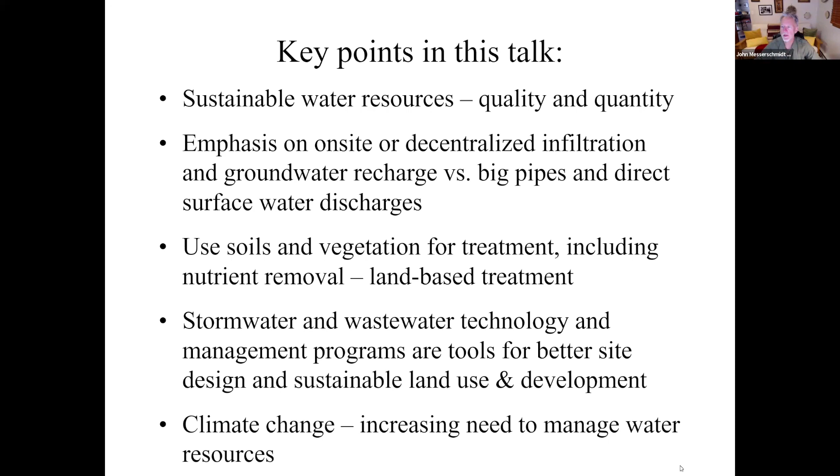So again, I'm not going to spend a lot of time on these, but basic groundwater hydrology principles are critical for a lot of this, just being aware of where the water is in the soil. Next slide, please.

And then another one—I won't go into this much, but part of the goal in all of this is to maintain the existing natural hydrology of an area and not disrupt it. I'll explain more about that a little later.

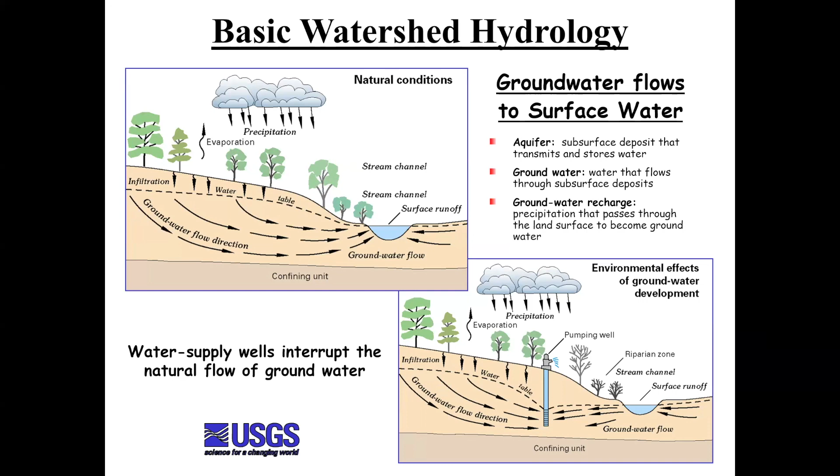Another slide, and this one I wanted to keep in here—it's a bit redundant, but the sun is a key principle for a lot of the way land-based systems work. Any system using soils and plants, like a septic system with grass over it, that lawn is doing work to pump water out of the ground as the grass grows, evaporating it and pulling up nutrients from the soil.

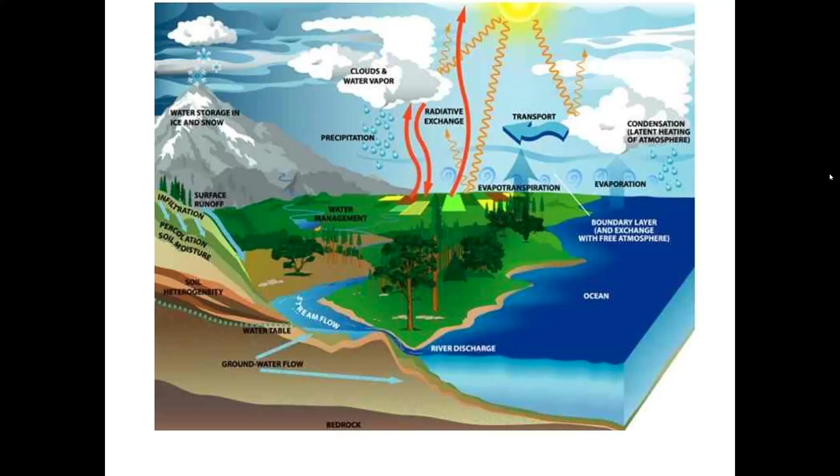This is here to show what happens when we alter hydrology in a big way—this is stormwater management and green infrastructure, which I barely touch on here. Green infrastructure is a term for natural, on-site stormwater management practices. It's now the approach of choice by EPA and New York State DEC, though the state hasn't embraced these ideas for wastewater. But the same principles I'm talking about are wrapped up in green infrastructure for wastewater in a lot of ways.

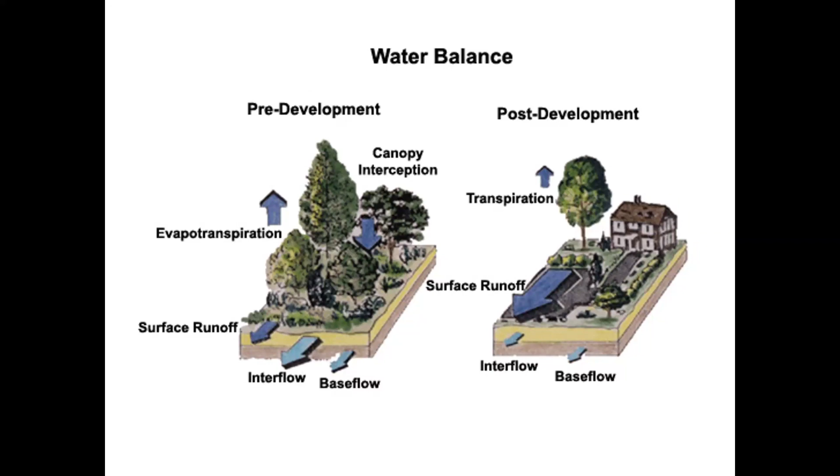So this slide shows on the left a pre-development, more natural watershed, where a lot of water soaks into the ground, becoming interflow and base flow, with very little surface runoff shown by the blue arrow. When you pave over the landscape and create a lot of impervious cover—buildings and paving—you cut off that recharge to the soil and get a lot more surface runoff.

This is another way of looking at the effects of this, over time—say 24 or 48 hours during a rainstorm, before, during, and after. On the left, in a more natural watershed, shown by the solid line, you have more water naturally in the ground—the base flow that's there from the beginning because it's been recharged more. When the storm hits, some gets into the soil and groundwater builds up over time, but it's slower and doesn't reach as high a peak.

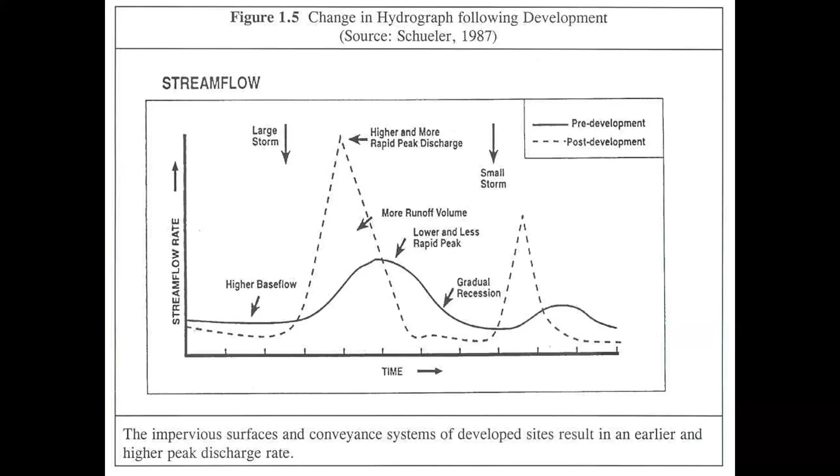The dotted line shows a paved landscape, depriving the groundwater of recharge. Your stream rises much more quickly during the rainstorm, which leads to flooding and erosion, and with the bigger storms we're getting, this is exacerbated. It drops off more afterward too, so you end up with a lower base flow and less groundwater left over, so to speak.

In places getting more developed, with more properties built, and most of the Rondout Valley is not like this, I'm sure, the stormwater issues and wastewater can both have impacts. That's why I've got this all in here.

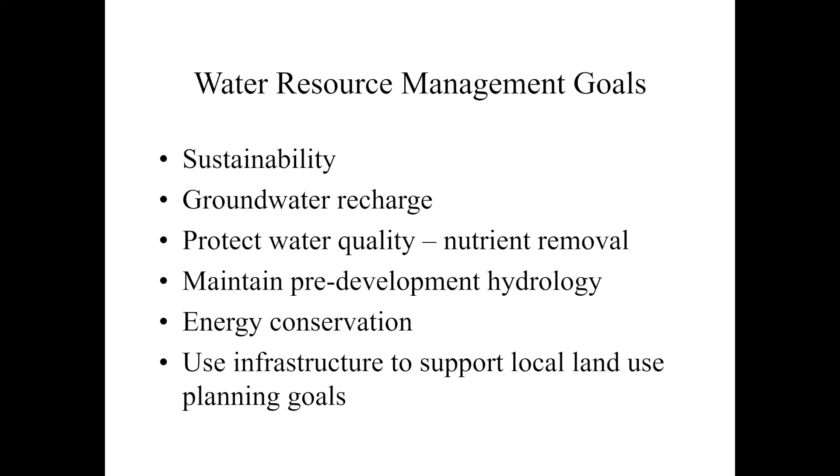So the goals we're really aiming for are sustainability, groundwater recharge, and removing nutrients from wastewater. Also maintaining the hydrology I mentioned, energy conservation—since treatment systems and sewer systems that move water can use a lot of energy if they have pumping stations—and using all of this to support your land use goals.

If you look at the history of sewers—London built sewers and put their wastewater all into the Thames. This is the classic example. But they didn't run it away from the city, and it caused a huge stink. They realized they had to get this away from there, so they built a big sewer system to move it farther downstream, which solved their local problem.

The sewer paradigm that developed in Europe and here was built to move wastewater away for sanitary and health reasons, to keep it out of drinking water and get rid of smells, but it didn't consider what we were doing to the environment, including groundwater. Gradually people realized we were polluting our water and it stinks, so we had to treat it before dumping it into the river. Treatment plants became a technology developed over time, and we now have wastewater water quality standards that are, in many cases, very high.

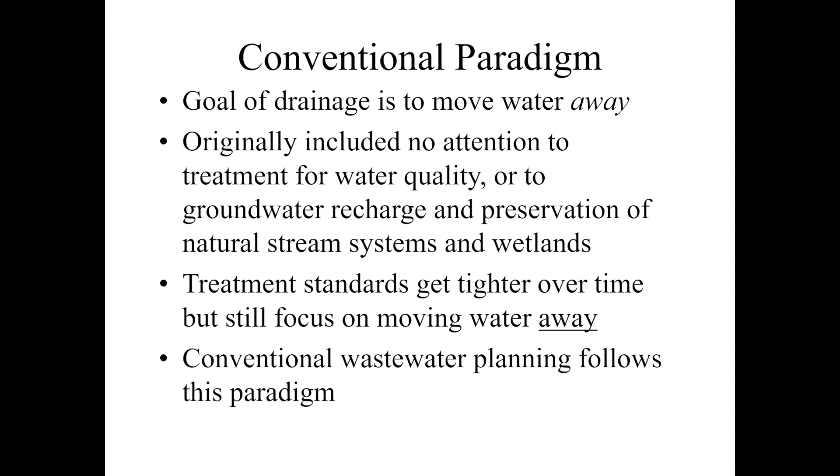So the sustainable approach is more to think about what you can do locally. How do you address all of these issues from the start before you invest in big sewer systems? Once you do, you're kind of in trouble.

Recycling the nutrients, I mentioned this before. You can use treated wastewater effluent, the treated water, to irrigate landscaping. You can irrigate trees and grow trees and use it as nutrients that make the trees grow faster.

And the other issue with bigger systems is the standard model, and this is getting a lot more attention now with environmental justice. You put a big treatment plant down typically by a river because you want to build the sewer system so it runs by gravity downhill as much as possible. Over history, the people who end up living near those places, or were living there in the first place often,

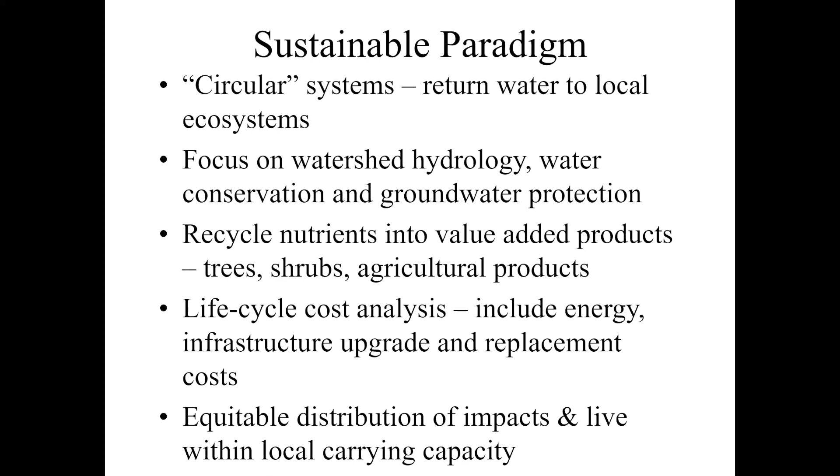So again, the big pipe is a term people coined that I like, that is a term for capturing this paradigm of the conventional approach, which is still, frankly, the preferred approach of the regulators, the engineers. The engineering community is a huge barrier to changing this.

It's a pond, and ducks will be on it, and you can't do that if you're concentrating all your wastewater in a big sewer, and you have 10 or 20 million gallons, or even 1 million gallons a day. It would be very hard.

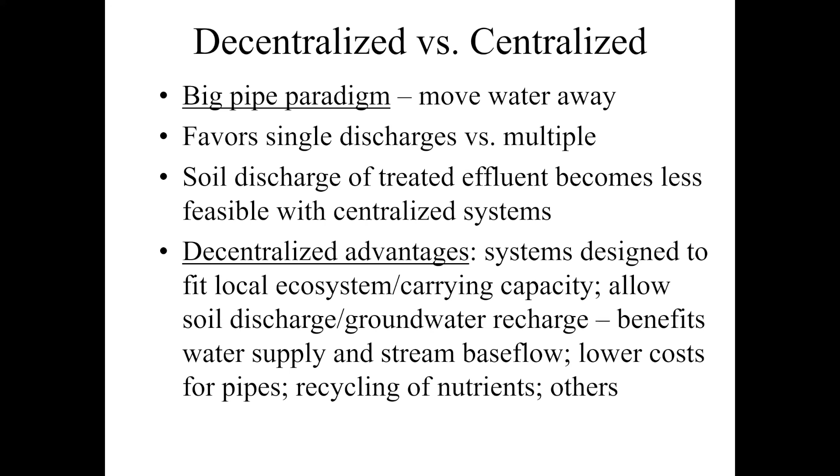But if you build a big sewer system, even at the scale of, say, one of the bigger communities that might be developing up there, and you do the classic approach that took hold in the 50s, 60s, 70s in this country, you plan for what you might need over 20 years. So, okay, in 15 years, we're going to have even more growth, and we have to have the sewer plant sized for that, and we have to size the sewers.

So you're investing all that money for capacity that's not going to be used for 10 years or more. And then that ends up driving the local politicians to see, okay, I've got a high new cost that we have to pay every year, and the people who are paying these rates are going to pay a lot of money. But if I get more development in here and use that sewer capacity up, we'll lower those rates. So let's attract some development to use all this capacity I just built. And that's a pattern that has happened.

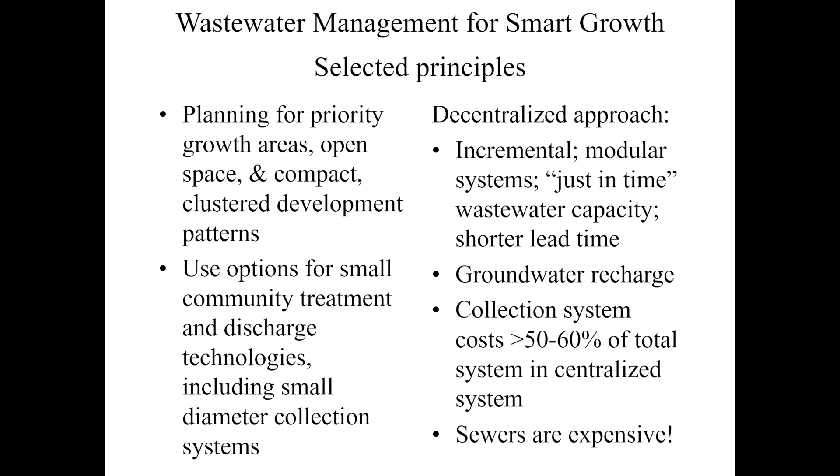Next step, next slide.

Centralized sewer systems drain water away. I mentioned something I didn't cover before about how it does it, because you're taking water out of the ground deliberately for drinking water and putting it into your sewer in the first place. Sewer systems also let water in through manholes, infiltration and inflow, or leaky pipes underground that are cracked.

The other thing I don't hear discussed much is that they act like a French drain. You've got a pipe along a buried trench with gravel at the bottom running downhill, so you're building essentially a drain for your shallow groundwater. If you have wetlands or small streams nearby, your whole groundwater table is liable to be lowered, even if there's no leaks in that pipe to let water in.

Finally, this is the problem that's also not discussed so much: these cracked old pipes leak wastewater out, and that wastewater has not been treated. So that's getting into the ground, and you can't see it. Next slide.

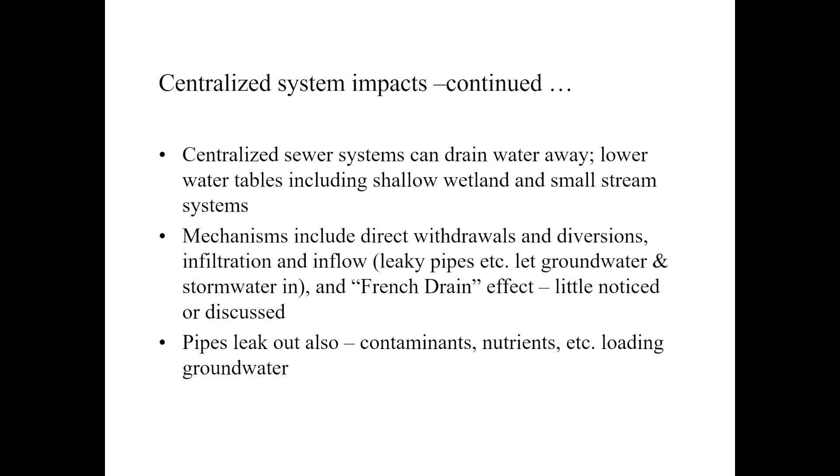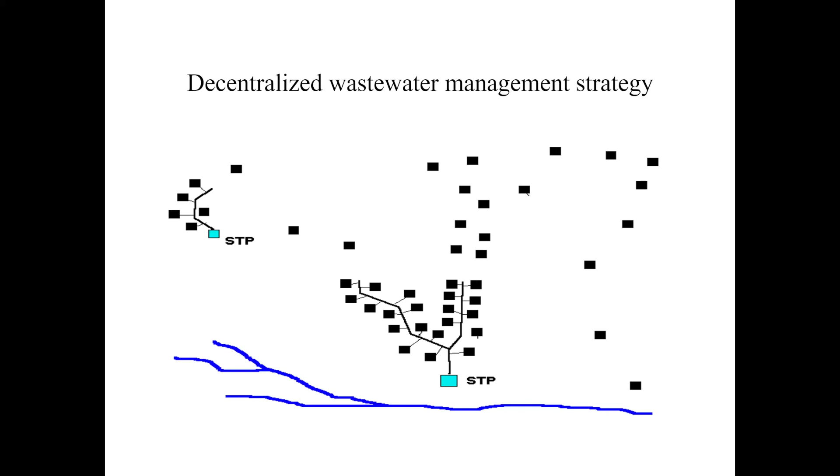Next slide, please. Yeah, that's the same—oh, there's something missing. Oh yeah, I see, it has an animation. I didn't see that.

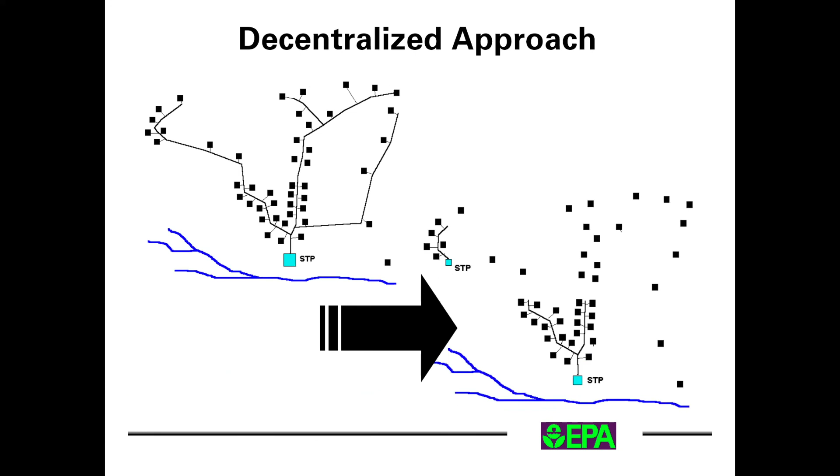Next slide, please. So, the nutrients—how many people here are aware of harmful algal blooms as an issue? Okay, yeah, some, and maybe others who aren't on camera. It's become a much bigger issue. The Wallkill River watershed was designated not long ago as impaired officially by DEC, meaning it's not meeting its water quality standard. The TMDL I list is an acronym for a plan for how to fix that, which is being developed. I'm pretty sure my friends in the Wallkill River Watershed Alliance were partly responsible for driving the DEC decision to do that—that's the watershed group for that watershed.

Nitrogen is the more abundant nutrient, but it tends not to be the main problem in freshwater bodies. There may be exceptions, it's complicated, but all three nutrients familiar to any knowledgeable gardener are nitrogen, phosphorus, and potassium that feed plants—those are the things plants need a lot of. In freshwater bodies, typically it's phosphorus that makes a big difference to water quality when you get a little bit more of it going in. That's the key concern now for harmful algal blooms.

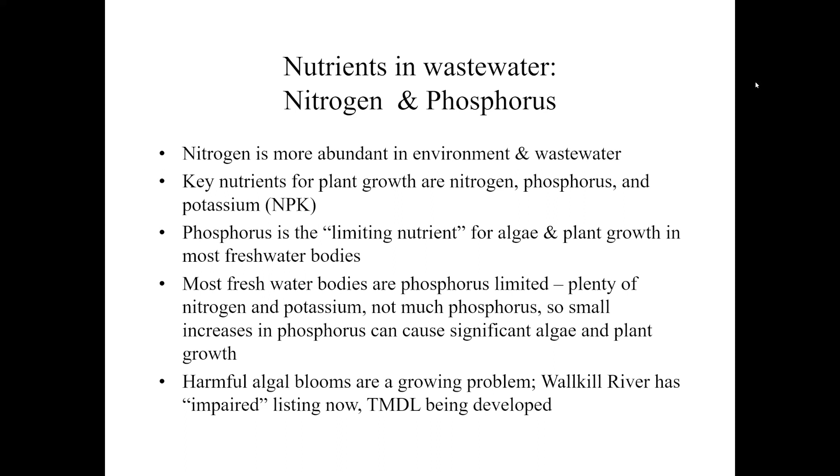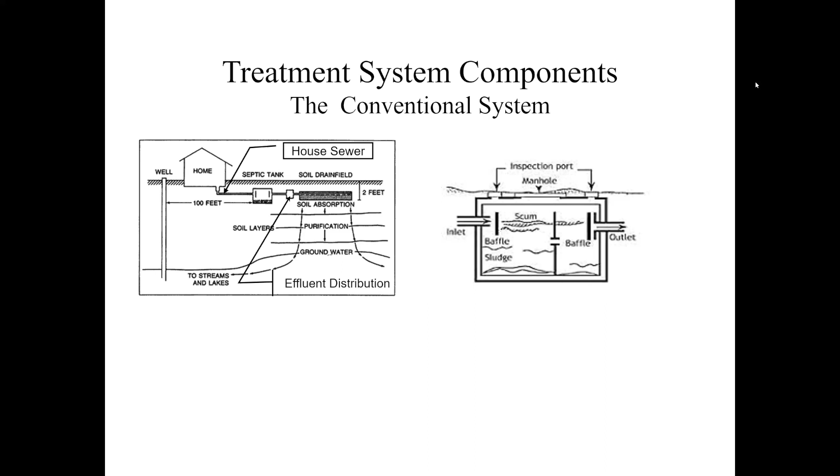The right side of this slide shows a cutaway of a septic tank. If you want, we could come back to this—I could talk a little bit more about what happens inside the tank and why it's important, but we'll move on for now. Next slide. Oh, I didn't see these parts when I put this slide together.

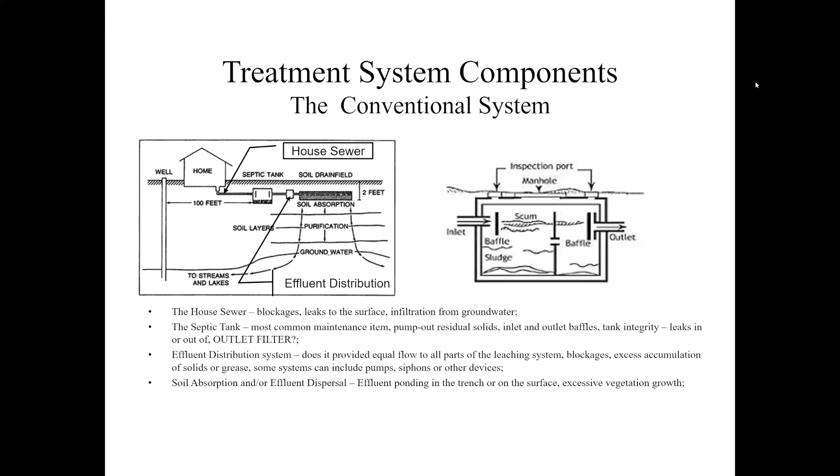To move up the ladder, so to speak, if you want to do more advanced treatment in an on-site or a small community system—meaning 3, 5 or more houses connected through a small sewer system to one treatment site—I focused on one brand called Advantex, made by Orenco, which was being widely used even 15 years ago. These are manufactured systems designed to provide more advanced treatment, taking out some of the nutrients beyond a standard on-site septic system, and they still put the water out, almost always, to a leach field or some kind of ground-based discharge. There are other brands, other makers.

If I can interrupt, what's the advantage of this Advantex system? The advantage of using a treatment technology that goes beyond a standard septic tank—where all you've got is a tank that goes out to the leach field or absorption field—is that you're doing a lot more treatment before you put the water into the soil. So your net result, when the water gets into the ground, or in some places they may use Advantexes to discharge to a surface water body like a stream, which is harder from a regulatory point of view, is that you're doing a lot more to keep water clean. That's the advantage, and there's a cost: it takes more maintenance to make sure these are working right. But a standard septic system needs maintenance too—that doesn't mean they get it.

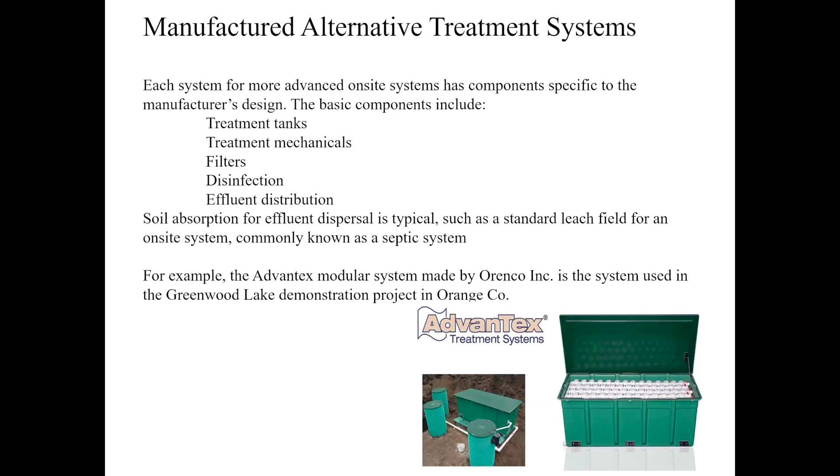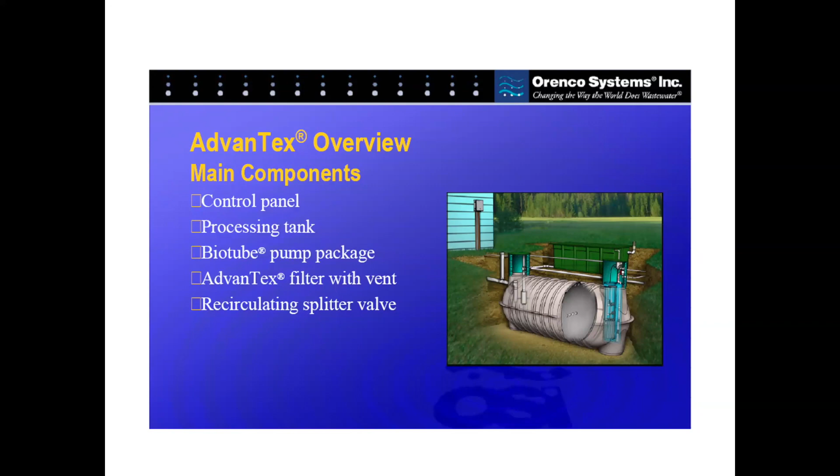So next up, this one shows a bit more clearly a schematic showing the system is going to be underground. Next slide, please.

I don't want to spend too much time on this because there's more to it, and I just happened to find this in older slides. I forgot all about this. There's actually a law on the books actively promoting the use of reclaimed wastewater for irrigation. I don't know whatever happened with that, but it's nice to have if you need it.

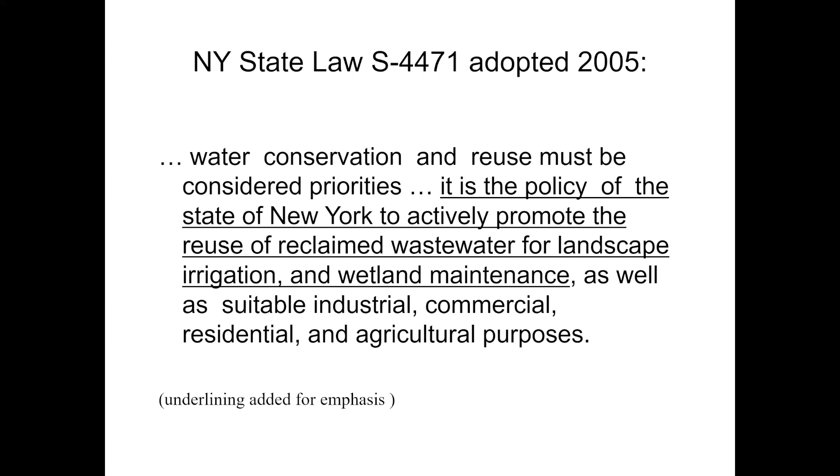Next slide. So now this is just going to be a series of slides. Again, I don't want to dwell on some of them too much because they're copied from an EPA slide set that's years old. But this is relevant for the kinds of approaches that communities in the Rondout Valley area can use going forward in an incremental way that build on what's in place already and could create a more robust management approach, with the community or municipality playing an active role to some extent. There are various options for how much role. EPA created this framework.

They rolled it out around here. There was a forum down at Bear Mountain that I helped plan a little bit, and they did one in every region of the country, in every EPA region, about this approach, which was essentially encouraging, where you're not going to put in bigger sewers, your options for a community, a municipality, or another organization, to enact a program to put in place steps to try to get better management of small systems. And essentially it's voluntary.

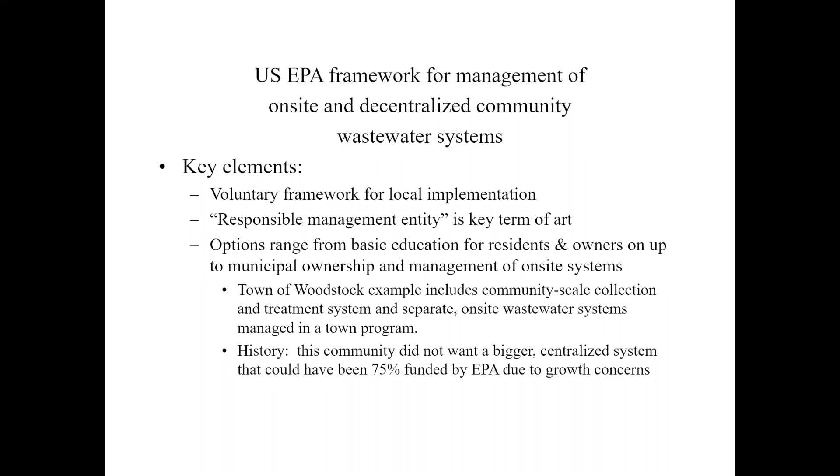So this is the overview of this management framework I just outlined. We'll just go through these quickly. These are the different levels. At the top is the title they give it, maintenance awareness. Find out where they are if you want to take that kind of step.

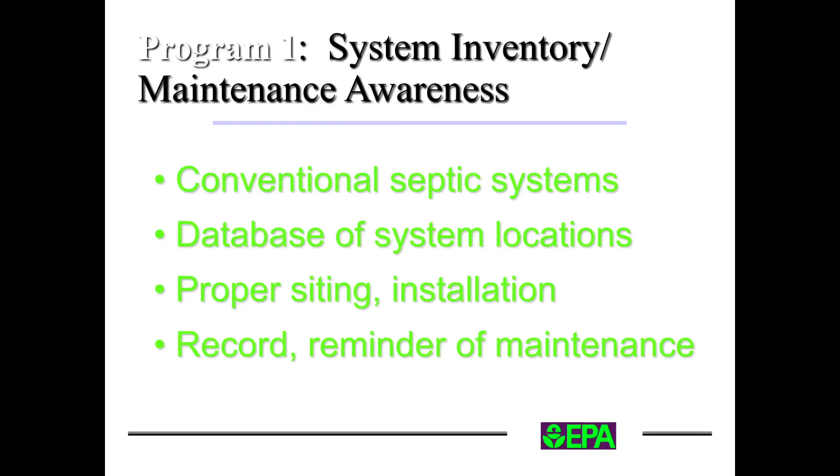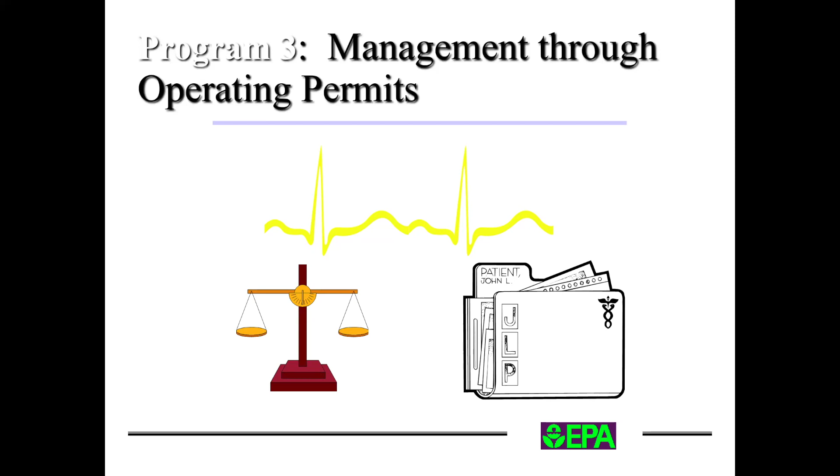There, you can use a maintenance contract. An individual homeowner can do this, or the municipality can. You can actually have a permit system so that whoever owns the system has a legal permit that's written, that says you have to do this for this system.

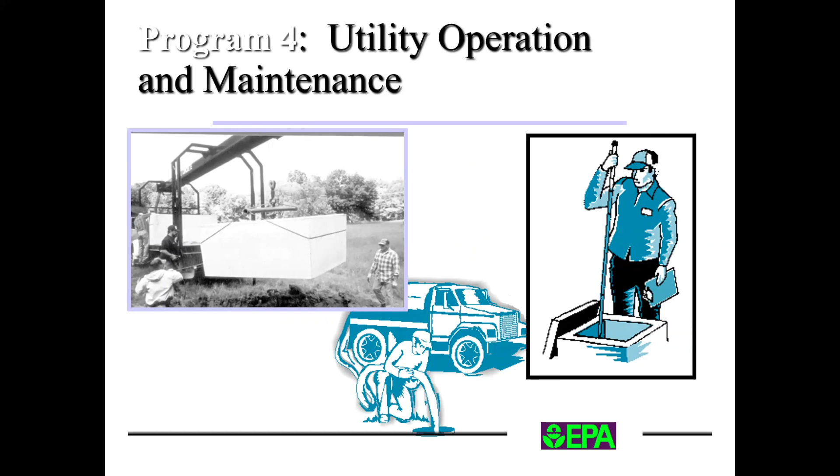This doesn't completely match what I said earlier about five levels, but here they're calling it a utility. That would mean, in what I said before, the municipality actually having their own staff. This is the highest level. They take ownership of it.

This is an approach EPA put out there to show municipalities, particularly, that you have a lot of options. It would be a good idea to do something about this, because right now, nobody's doing anything, really. The state health department in New York, the county health departments, typically only really go out and look at systems if there's an abject failure, like raw effluent running on the ground. It's up to homeowners and other people to maintain their on-site systems. Nobody's watching over their shoulder.

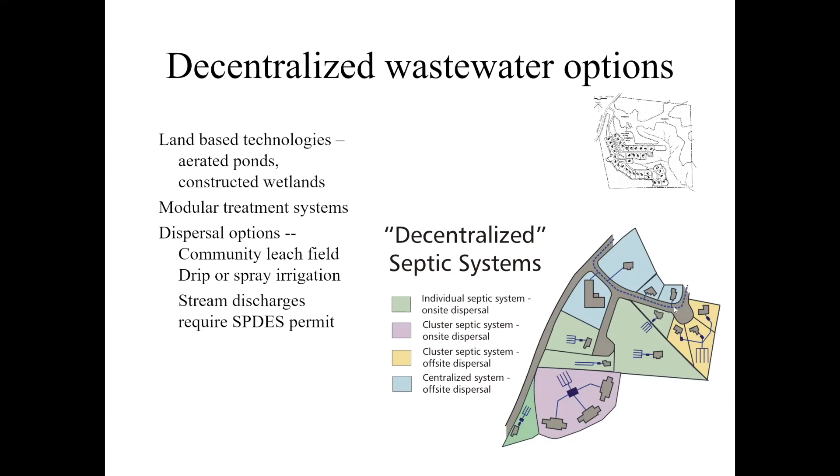This is another benefit of sticking to the small scale approach that I'm advocating. I thought about this a lot by this point, and I heard that the Rocky Mountain Institute, one of the top think tanks on energy issues in this country, was doing a report on decentralized wastewater management. I wrote a contact person there an email asking a question. Two years later, when they published their big report, they published my email and an answer saying this makes sense. This is one of the many items, 9.3, support of local economies, as a benefit that they called out. This is the best report I know about to this day. It's 20 years old now, but it really goes into a lot of detail, explaining a lot of the benefits and also the problems and impacts I mentioned. And it's not biased because they're honest about talking about the downsides of decentralized systems too.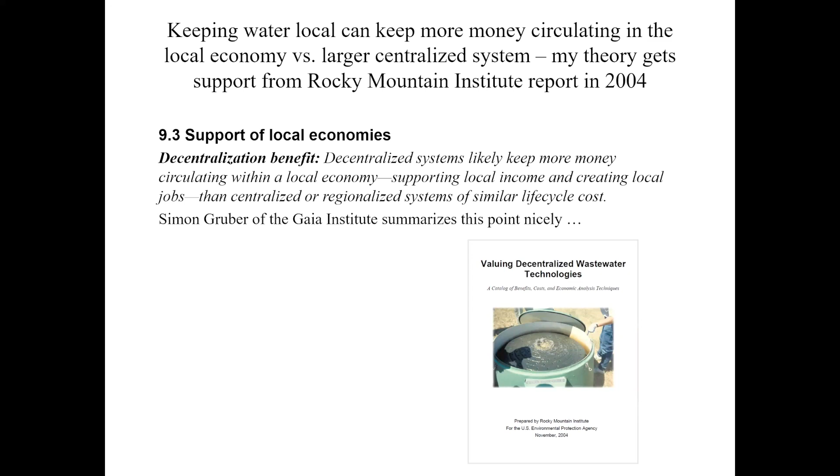So that's what I thought through, and I wrote it out. The email I sent them is like two paragraphs. It's in this book, and this is what I got. After that, they summarized it - they have a set of information, about a two-page piece. I can send a link. I should prepare a set of links for all of you to have for more information. That report is available for free on the web.

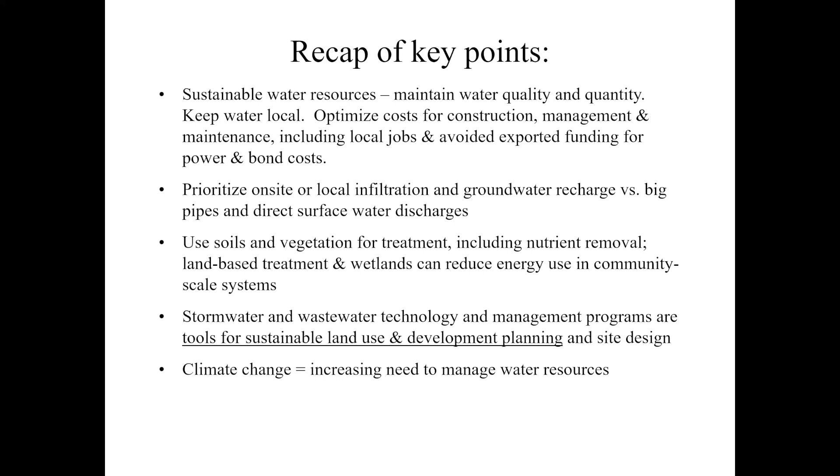So this is the recap. We're near the end. I pretty much said all of this already, and don't need to repeat it. This is sort of the closing.

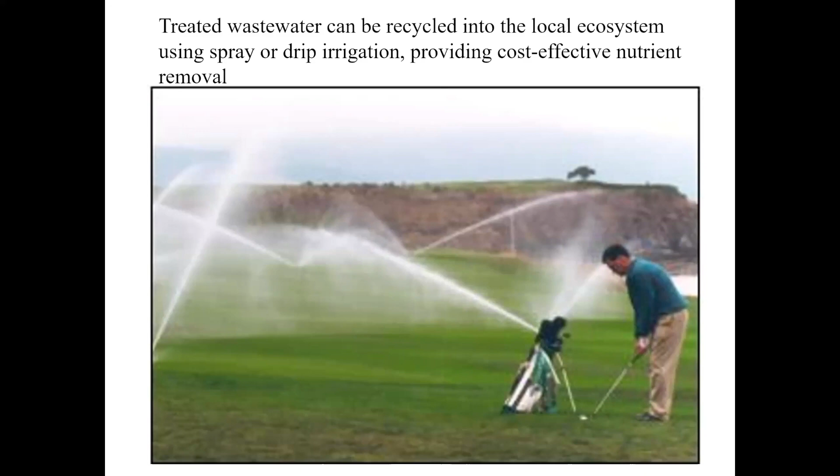Next slide - there's the guy who's desperate to play golf that day. Honestly, the idea of spraying while someone's out there - you don't spray every day, to be clear, because if you did that, the ground would get wet. You have to apply water in tandem with what the grass and plants can take up. You have to manage it, but it's doable.

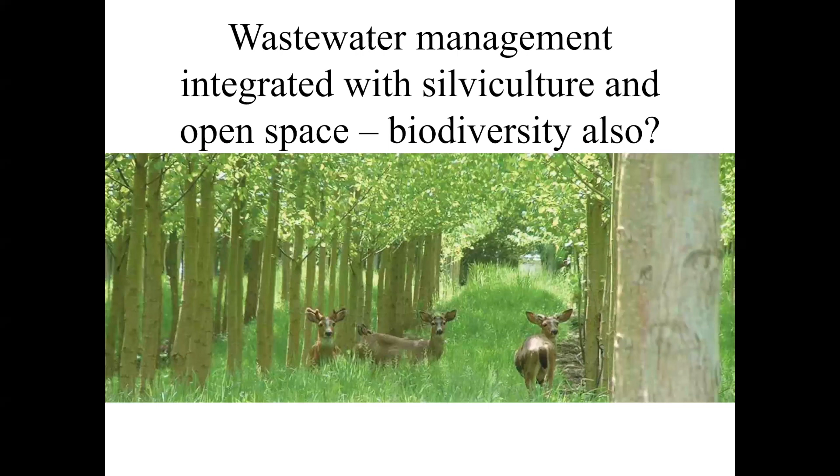Finally, I just want to show this - it's actually a sort of tree farm where they were using treated wastewater for irrigation. The point of this is partly that we can combine various uses of open space. They can be beautiful areas, they can even be recreation areas, and also be places where we produce trees, and places where we can manage our water. That's an interesting way to think of it.

So thank you for listening - and longer than I planned, but much longer. So I'm available for questions.

Hi, I have one - let's see, you were talking about the history of, okay Todd, and after I ask my question, I get the answer. Was England the first official wastewater management system? You mentioned them as being kind of the first. Do you know what they did before that, and what year that was?

Well, I mentioned London because it's notorious in this topic. No - Rome, famously, had sewers, and I don't know, I doubt they were doing much, if anything, to treat the water. So they were probably just moving raw wastewater somewhere away from where most people lived.

But there's a long history of how people have managed wastewater and water, for that matter. It's quite fascinating, and I didn't really get into it at all. I just read again recently that until sewers were developed in many cities - cities weren't so big back then - a lot of human waste went into pits in the ground.